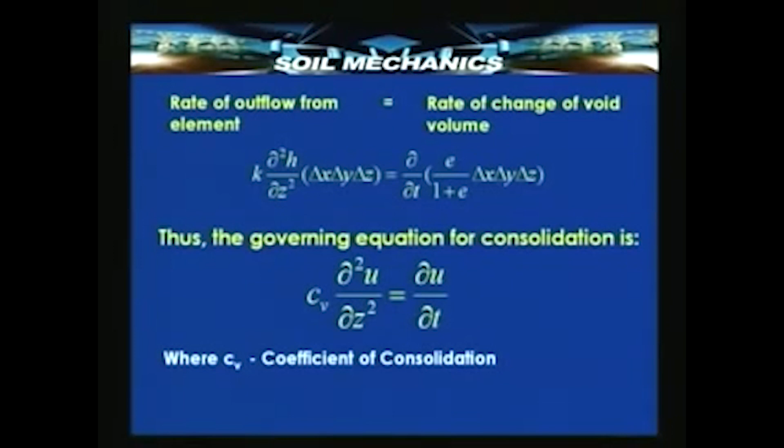This expression shows that u is a function of z as well as time. The constant Cv in this expression is known as the coefficient of consolidation, and we must now solve this differential equation to find the relationship between u, the excess hydrostatic pressure, and the two parameters z and t on which it depends.

Let us see the next slide, which shows the sequence in solving this basic phenomenon. Since this is a differential equation, as is normal practice, let us assume the type of solution, the possible pattern of the solution, and then check that if this has to be a solution for the given differential equation, what is the way to solve it.

We assume that the excess hydrostatic pressure u is a function of Fz and phi t, where Fz is a function only of depth and phi t is a function only of time. Since these are independent functions involving independent variables, this process is known as separation of variables. We can now substitute these into the differential equation, Cv delta squared u by delta z squared equals del u by del t, and then obtain this constant.

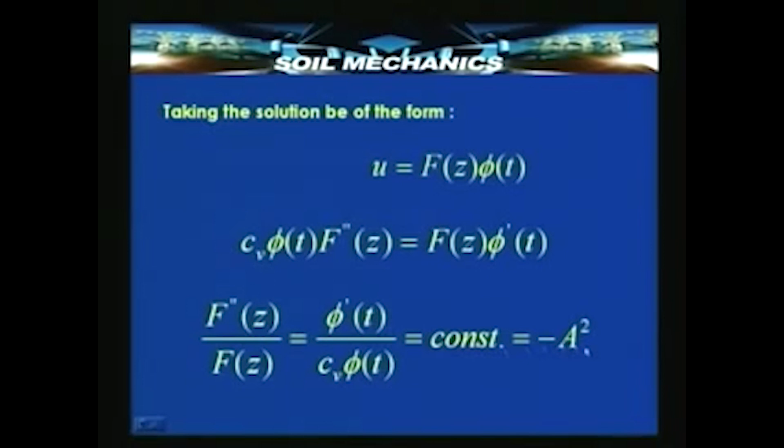Once we have this constant, we can formulate two equations, one for z and one for t, which if solved will give us the total solution for the differential equation. So the total solution is a product of the solution for F(z) and the solution for phi(t). So F(z) times phi(t) gives us u.

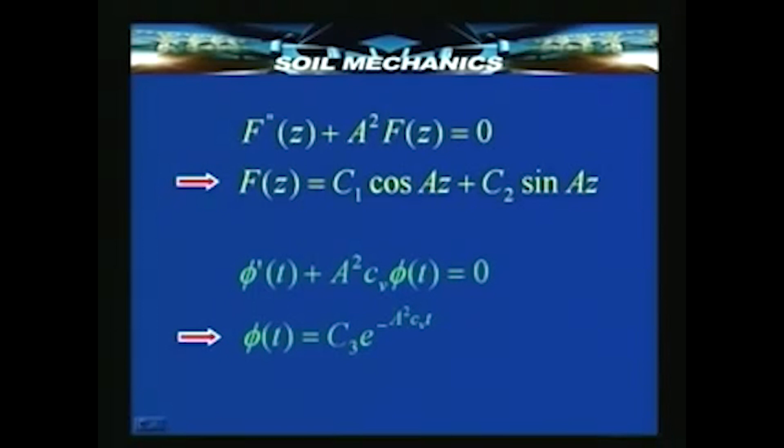F(z) involves sine and cosine functions, with constants C1, C2, A, and phi(t) also involves a constant C3. When we multiply these two, some of these constants also get multiplied, so we can combine them and get a simpler equation: u equals C4 cos(Az) plus C5 sin(Az), times e to the power of minus A squared Cv t.

So now this is the solution in which the constants are unknown. If we determine these constants - basically three constants, C4, C5 and A - the solution is ready. To determine these constants, we always need conditions. We need to know some aspects of the phenomenon which we are trying to study.

For example, this phenomenon involves z, which means the boundaries of the problem, the geometry of the problem. If we know the value of u at some values of z, that can be used for calculating some constants. Similarly, if we know the value of u at some known value of time, that can be used for calculating some constant.

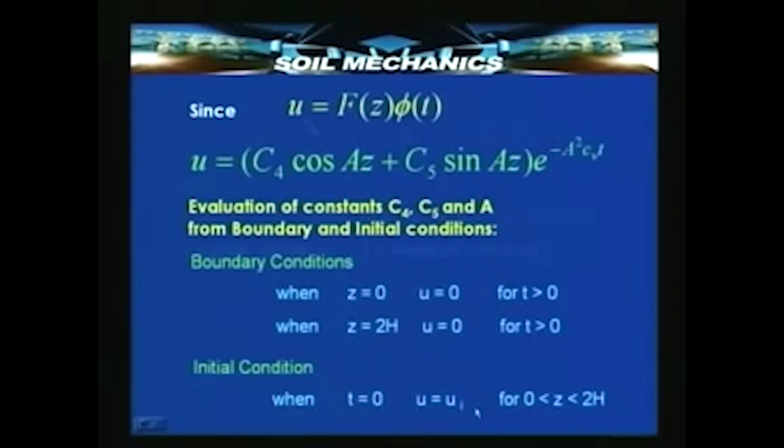So that is precisely what we did - we defined the so-called boundary conditions and the initial condition. Let us take a look at them. The boundary conditions were: at the top of the clay layer and at the bottom of the clay layer, the value of pore pressure, excess hydrostatic pressure, is 0 for all times. The initial condition is that at t equal to 0, the pore pressure is uniform throughout the depth from 0 to 2h, equal to the initial pore pressure ui.

Based on all this, we derived expressions for three parameters. The first is the excess hydrostatic pressure, but just knowing the pressure alone is not our objective. Our ultimate objective is to know what is the amount of consolidation that has taken place at any given point of time. So we need to know the so-called degree of consolidation.

Why we resort to defining consolidation in terms of a degree is because we know the total consolidation - we can always compute it without resorting to this mathematical expression, simply by knowing the change in void ratio over a change in stress range. Once we know the total compression that is likely to take place, the compression at any point of time can be expressed as a percentage of that, which is what we call the degree of consolidation.

There are two ways we express the degree of consolidation. One is uz, the degree of consolidation at any depth z, which is the amount of consolidation that has taken place at a particular time divided by the total consolidation expected there. Another parameter is U, which is the average of all u values over the depth z. So we have expressions for small u, capital Uz, and capital U - these are the three basic expressions we derived last time, which we will use in our computations.

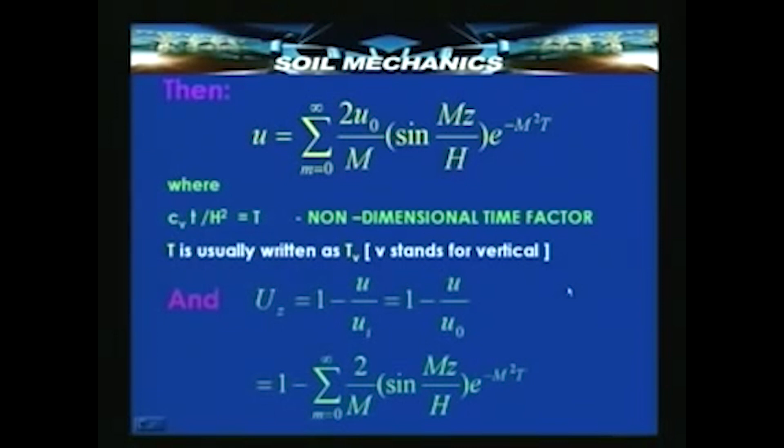So, h is therefore the distance of travel of the water, that is the maximum so-called drainage path. Then the average consolidation has this expression, which again is a function of capital T.

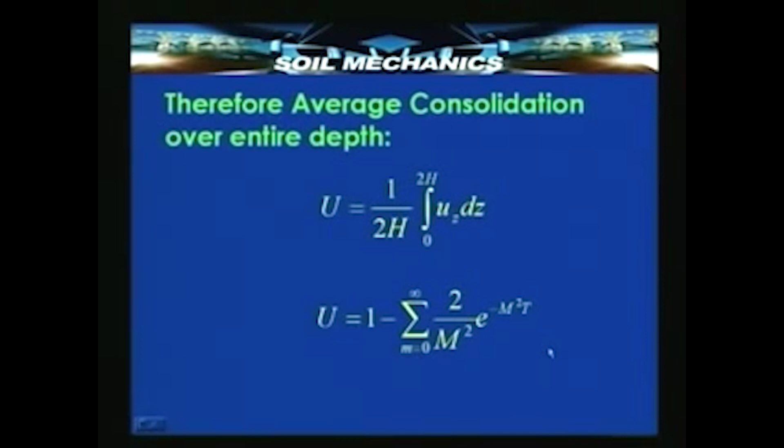Now, let us see some details of the actual values of these degrees of consolidation. That is what we will be doing in today's lecture.

In today's lecture, we shall try to understand the importance of this consolidation equation. You have seen that in this consolidation equation there is still one parameter Cv, which is not dependent upon the initial and boundary conditions. It is not a constant that depends on initial and boundary conditions, but it is a material property.

So this Cv needs to be determined by some experimental technique, and we already know that for studying the phenomenon of consolidation, we have an excellent technique called the oedometer test. We shall also see how to use this oedometer test to compute the coefficient of consolidation Cv.

Then we will follow it up with one or two examples on the use of these values in computation of settlement, particularly the time rate of settlement, that is how much settlement will take place at a given time.

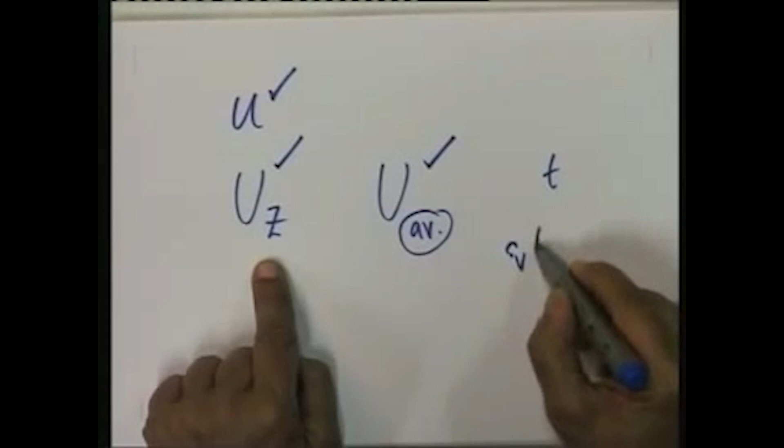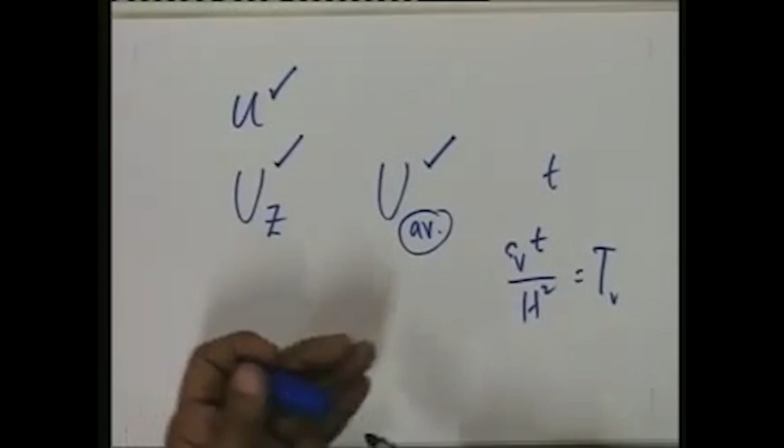Once we know the expression for uz, we can put different values of time into it. Time is expressed in terms of the non-dimensional time factor Cv t by h square. So we shall express time in terms of this non-dimensional parameter Tv and substitute that in the expression for uz, then we will know how the excess hydrostatic pressure varies with respect to time and depth.

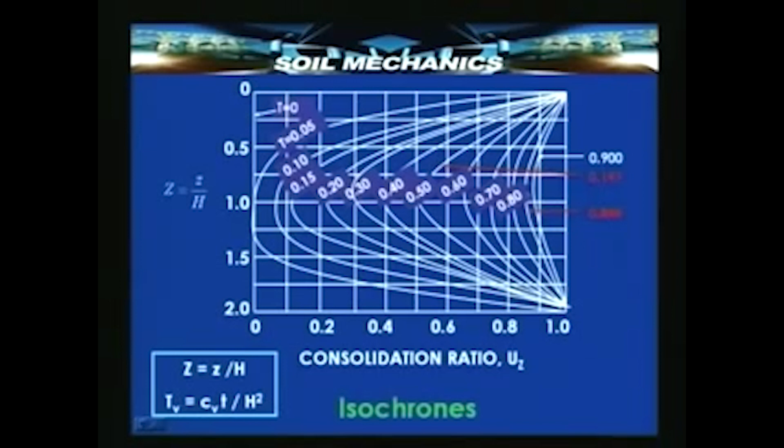Now, these two values have been arrived at by substituting the degree of consolidation in the expression for degree of consolidation and computing the corresponding T. So either you can substitute capital T and find out how the degree of consolidation varies, or for a given degree of consolidation, say 90%, you can find the corresponding time. For 90% we have 0.848, and for 50%, 0.197.

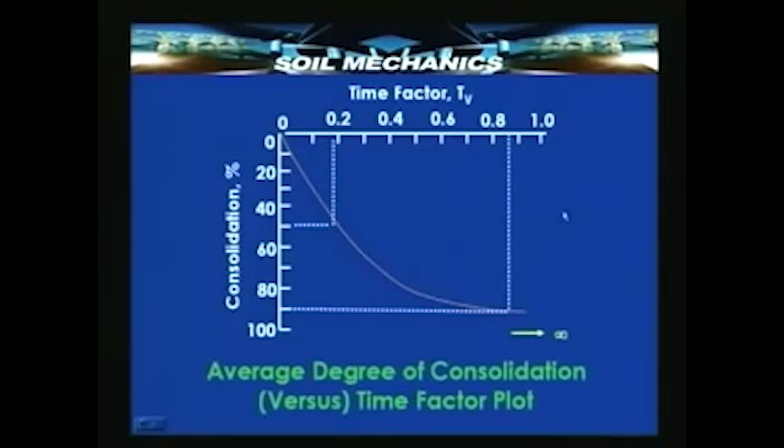Here is again the average degree of consolidation over the entire depth, and once again you find that at time factor 0.197 the average degree of consolidation over the entire depth is 50%, whereas 90% consolidation takes place at 0.848 time factor. Now, you will see that the point of 100% consolidation is rather difficult to locate.

It takes theoretically infinite time, but in practice it takes several dozen hours. So if you apply an increment of load and wait a sufficiently long time, there are chances of the dial gauge reading in the oedometer test becoming virtually constant, indicating that the level of 100% consolidation has been reached.

Now, we very often need this UT relationship in two ways. For a given degree of consolidation or average consolidation, we would like to know what is the time that is going to be taken by a given structure, or for a given structure at a given time what is going to be the amount of consolidation that would or would have taken place. So we need these values.

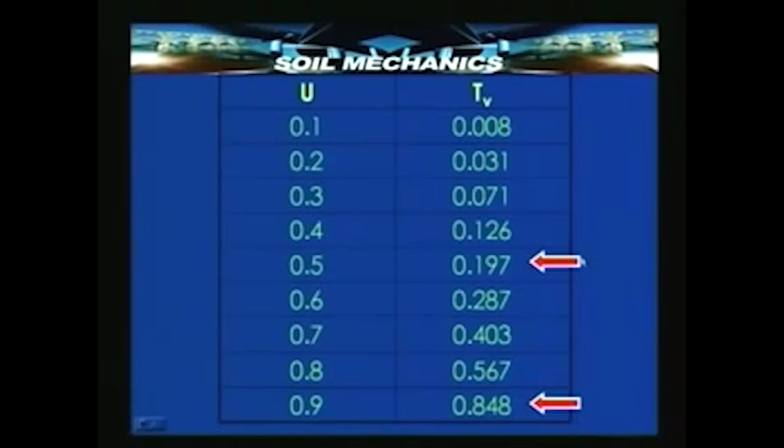We have already seen in the form of graphs, two graphs or two charts, how u versus t varies, but it is more convenient to use a lookup table like the one shown in this slide. Here you find a lookup table of u and TV, u varying from 0.1 to 0.9 and TV varying from 0.008 to 0.848, and for known reasons u equal to 1 has been left out. Two values have been highlighted, corresponding to 50% consolidation and 90% consolidation. These two values in particular are very useful, as you will see shortly.

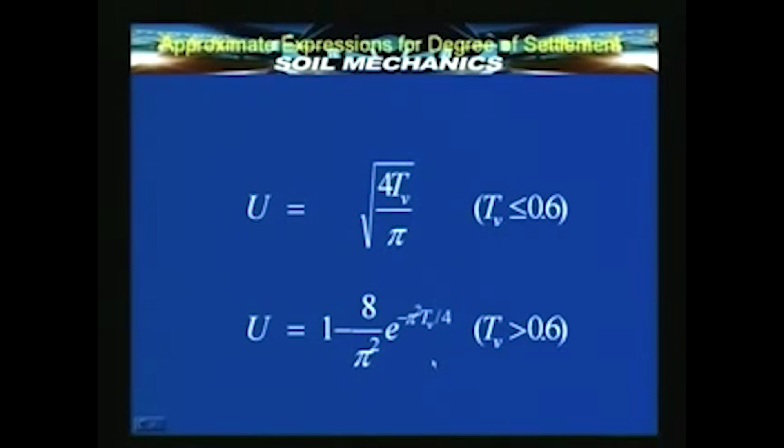The most important issue now is the determination of the parameter coefficient of consolidation. Coefficient of consolidation can be very conveniently determined from the oedometer test. There are two methods for this purpose.

One is devised by D.W. Taylor, a well known soil mechanics engineer, and another by A. Casagrande.

What is special about these two methods is they are both curve fitting methods. That is, we get an experimental curve of compression versus time, and we do some curve fitting on these in order to get certain data on the basis of which we can compute the value of CV. CV is basically dependent upon small t, and therefore if we can get two values of t and the corresponding degree of compression in an experiment, we will be in a position to compute the value of CV, and that is what we try to do.

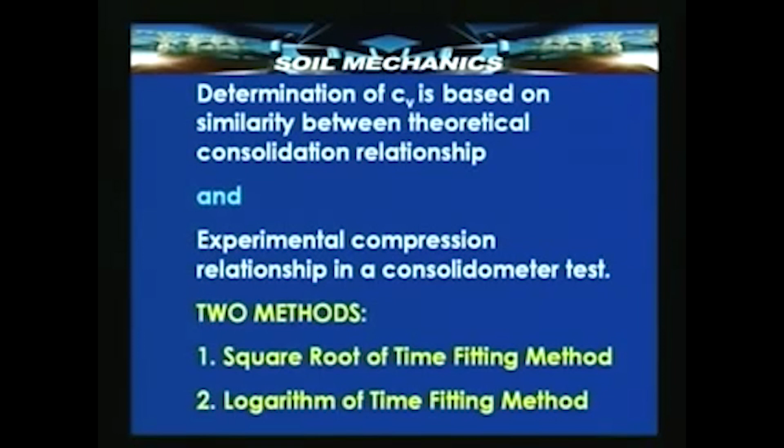As I mentioned, both these methods depend on the fact that there is a similarity between the theoretical consolidation relationship and the experimental compression relationship in a consolidometer test. This means that in a theoretical consolidation equation, we know the precise relationship between u and t. We have seen it in great detail in several of the slides just now.

If you look at it carefully, this capital U is nothing but the representation of the compression of the voids in some terms, and capital T is nothing but a representation of the time elapsed. So the relationship between capital U and T has to have some similarity to the plot of compression, that is dial gauge reading variation with respect to time. It is based on this similarity that the methods of curve fitting have been evolved for determining CV.

What Taylor has done is use dial gauge reading versus root of time, considered similar to U versus root of capital T, whereas Casagrande has taken dial gauge reading versus logarithm of time as similar to degree of consolidation versus logarithm of capital T. Let us take the square root of time fitting method and see how that operates.

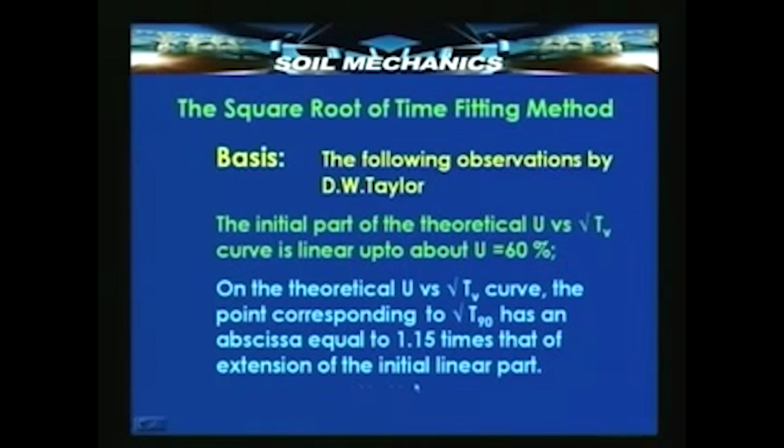The point corresponding to root of T90 is found to have an abscissa of 1.15 times that corresponding to the extension of the initial linear part. Let us take a look at the curve again.

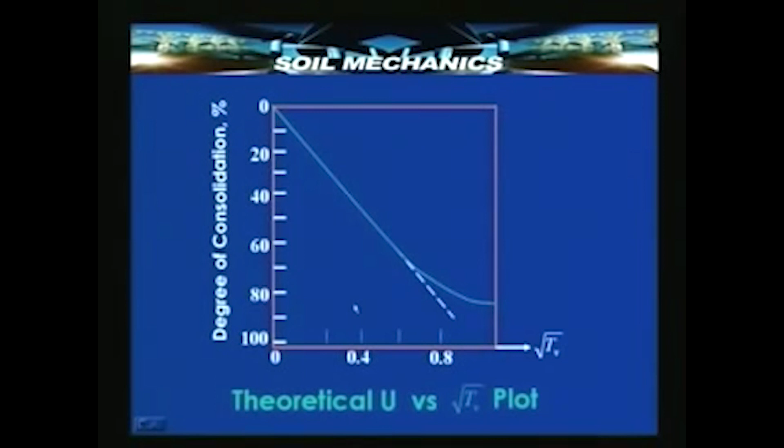See, the point corresponding to 90% consolidation here is found to have an abscissa which is 1.15 times that of a corresponding point on the line extended here, and that is a basis for determining Cv. That is, we take an identically similar looking curve, the curve of dial gauge reading versus root of small t, and in this we try to locate the point which has got an abscissa which is 1.15 times that on this straight line.

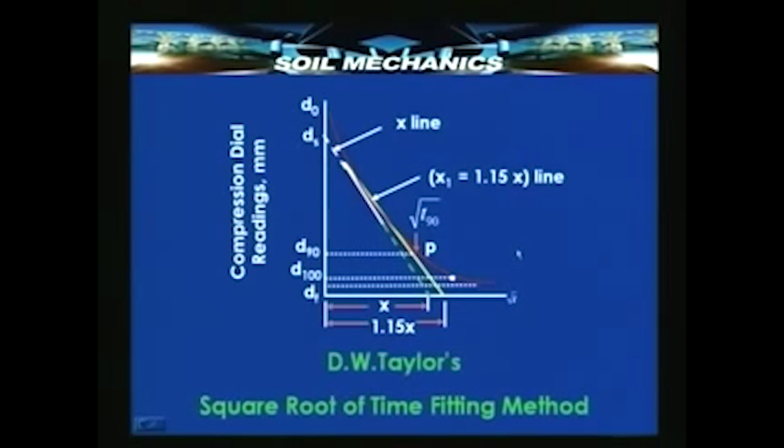And once we know D90, we will know T90 or root of T90. Once we know root of T90, we already know the relationship between small t and Cv. We know the sample thickness in the oedometer test, and that we are providing double drainage on both sides, so we know the maximum drainage path is half the thickness of the sample — the maximum distance water from the center of the sample has to travel to get out of the soil element.

So root of Tv corresponding to 90% can be determined from this graph. Once we know that, since we already know capital H and that the capital T value is 0.848 for 90% consolidation, we can use all this information for calculating Cv.

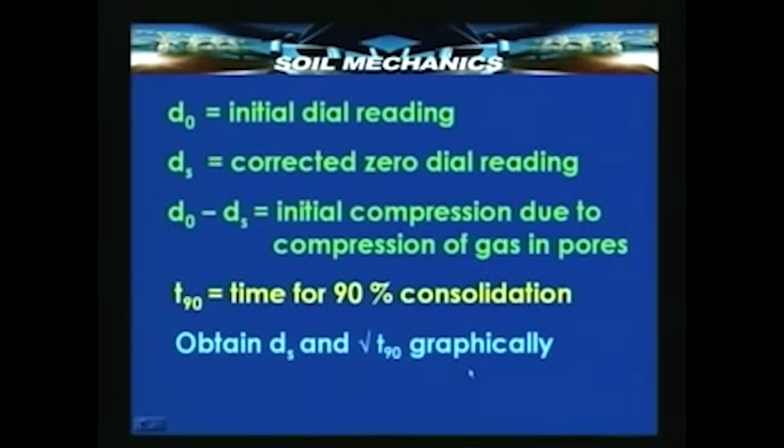So if you have the initial dial gauge reading D0, first you have to work out the corrected zero dial reading after accounting for gas compression and so on, because that is the point where the straight line part of the curve will cut the y axis. So D0 minus ds is the initial compression of the pores due to compression of gas. Once we obtain ds and root of T90 graphically as shown earlier, we can easily determine Cv.

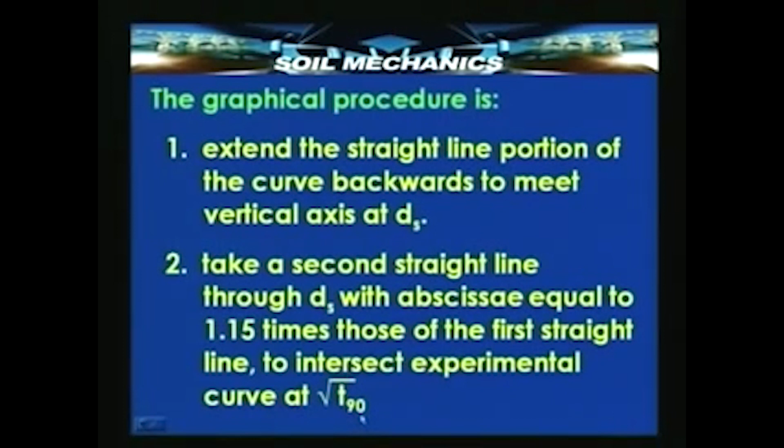The graphical procedure, as I mentioned earlier, consists of two parts. One is drawing the straight line portion so that it meets the vertical axis at ds, and then extending it, and then taking a second straight line with abscissa equal to 1.15 times those of the first straight line, and finding where it intersects the red curve — that is the point corresponding to root of T90.

Finally, once we know capital T90 is equal to 0.848, we have a method to calculate Cv, since we know small t90 and capital H, which is nothing but half of the average thickness of the soil sample in the oedometer test.

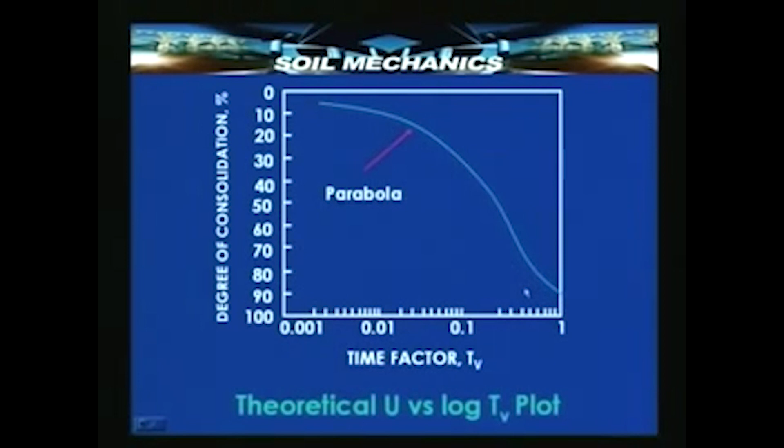Now the explanation for the logarithm of time fitting method becomes much simpler. Here, degree of consolidation is plotted against log of Tv, that is against Tv to a log scale, and this is found to be very close to a parabola, and it is found to be similar to the experimental curve where we plot dial gauge reading with time.

We will now see the logarithmic method of Casagrande, in which u versus log t is used. It is seen that the u versus log t curve is similar to the dial gauge reading versus log time curve.

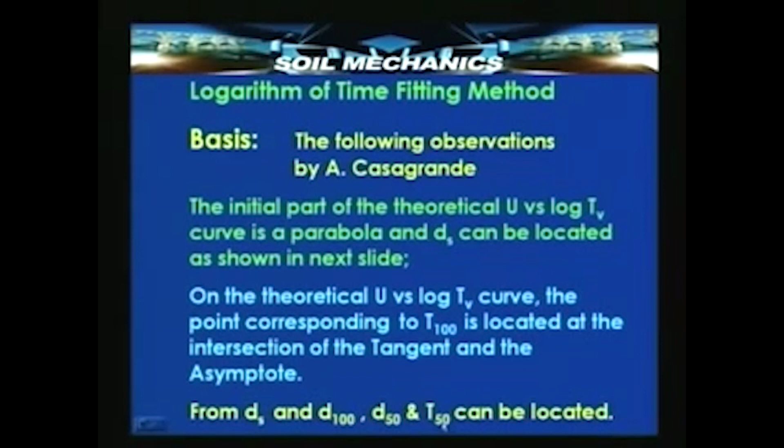In this method, instead of T90, we locate T50. We need to locate the starting point corresponding to ds, and the point D100. Once we know the dial gauge reading corresponding to 0 and to 100, we can interpolate and find the dial gauge reading corresponding to 50 and the corresponding time factor capital T50. Here is the explanation for the method in pictorial form.

Once we know small t50, again we use the same formula involving Cv and get the value of Cv.

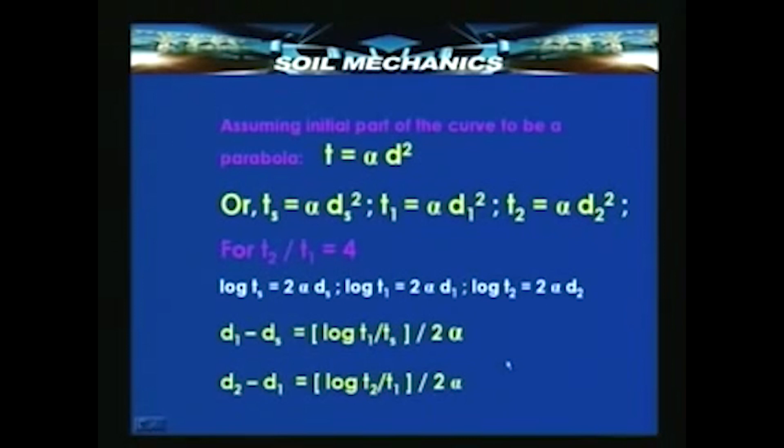Let us see the reason. We have taken the first part to be a parabola, that is time must be proportional to alpha d square. At all times on the parabola, time must be proportional to d square, because the parabola has an equation of the type y equals ax square. This means at the starting point Ts must equal alpha ds square, at point A, T1 equals alpha d1 square, and at T2 it equals alpha d2 square. Since T2 by T1 is 4, we find that on the logarithmic scale d1 minus ds and d2 minus d1 are both equal, absolutely similar, and that is the basis for computing this distance and arriving at the correct starting point ds.

So we select any two points A and B, one having time T1, the other having time 4 T1, and using the difference between these as a starting point, we choose a point ds which will have the same difference in ordinate as shown. That means ds is located.

Now what remains is to locate d100, taken as the intersection point of the tangent here and the tangent at the last portion of the curve. These two intersect at a point corresponding to which the time is t100, the degree of consolidation u is 100%, and the dial gauge reading is d100.

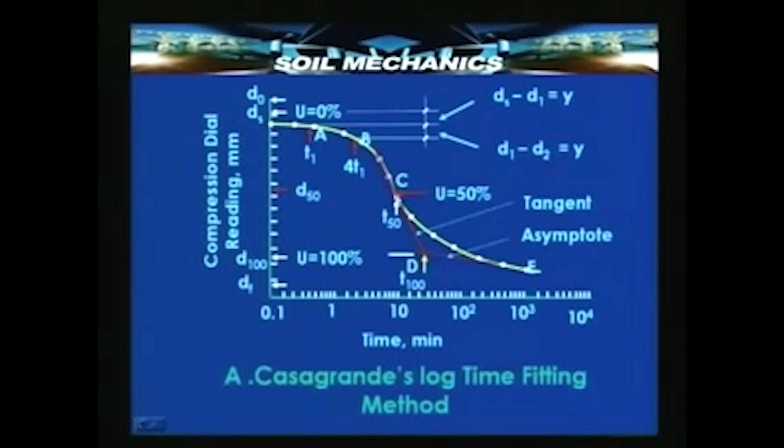Between these two, somewhere in the middle lies d50 and t50, on the basis of which we calculate the value of Cv. So by making d1 minus ds equal to d2 minus d1, we are able to calculate the starting point of the curve.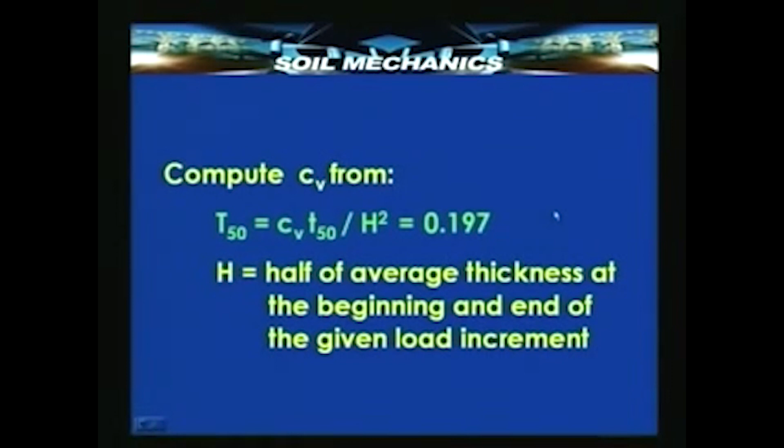Once we know T50, since it equals 0.197, we can substitute that and get the value of Cv. Capital H corresponds to half the thickness of the sample, and since the sample thickness varies during the experiment, we take half the average thickness of the sample for computation of Cv.

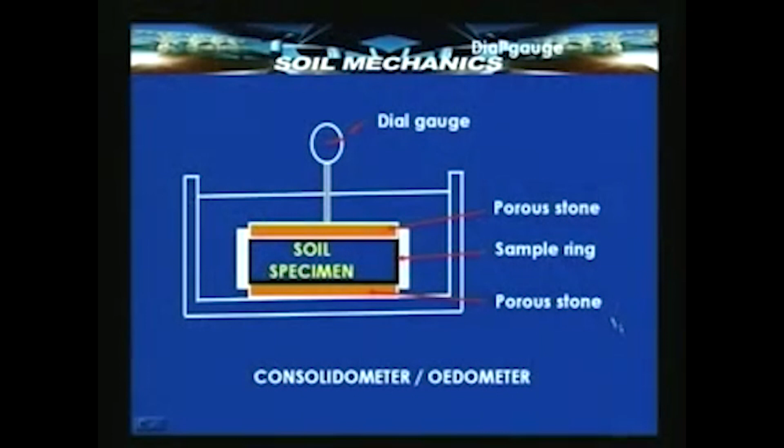I had mentioned in one of my earlier lectures, which I am now briefly reproducing, that there are four different compressibility parameters: Cc, Av, Mv, Cv. These are the units, and it is possible to determine all of these from this well known consolidometer test.

As a starting point for determining these, we need to know the void ratios. We have the dial gauge readings, which we gauge from the experiment, the so-called oedometer experiment, and we have the time, or root of time, or logarithm of time, as the objective may be.

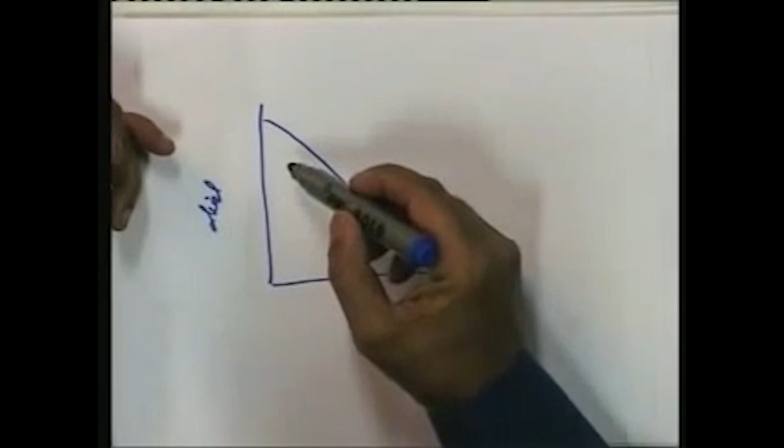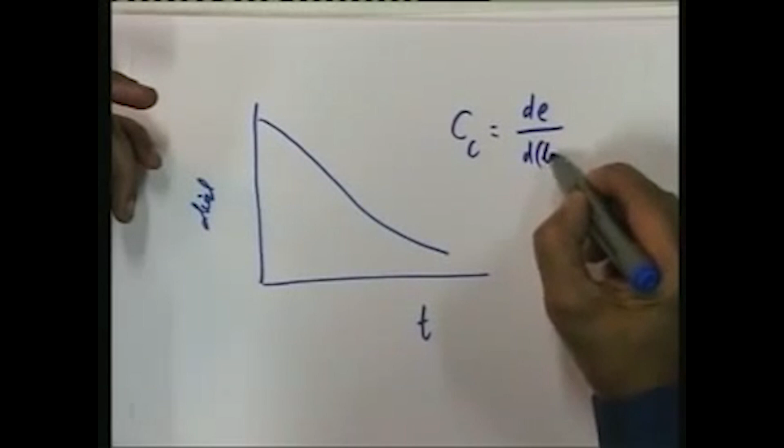This is a curve somewhat like this, and ultimately we are interested in knowing the change in void ratio, because for determining Cc, we need the expression de by d log p, and for determining Av, Mv, we need de by dp. This means that void ratio versus pressure curve is a must. It is unavoidable, it needs to be drawn.

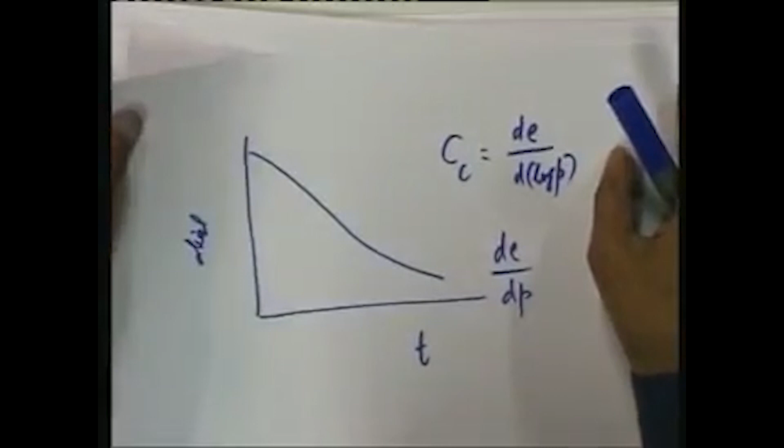This means it is not always sufficient to just plot the dial gauge reading versus time. That is okay for computing the coefficient of consolidation Cv, but to compute void ratio changes, we need a little computation based on the dial gauge reading variations. Void ratio computation can be made by two methods: one is the height of solids method, the other is the change in void ratio method. Let us take a look.

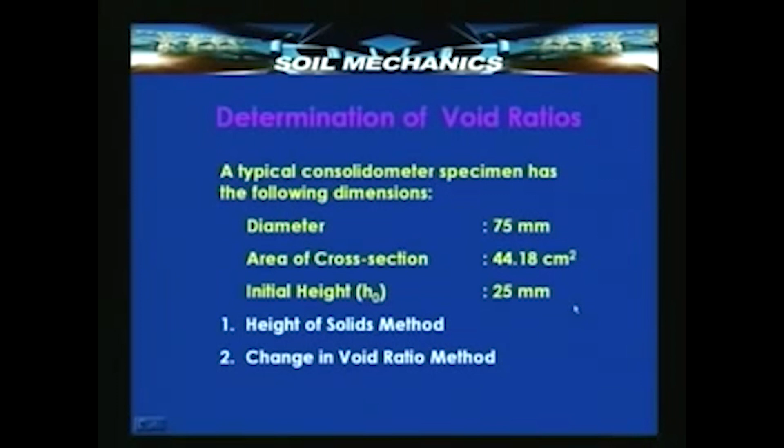In a consolidation test, typically we know the diameter of the specimen, therefore we know the area of cross section, which is pi by 4 d square, and we know the initial height, 25 mm. It is all standardized, the equipment is internationally stipulated, so these dimensions are known. In the two different methods, we try to relate the dial gauge readings through the compression of the soil sample to the void ratio.

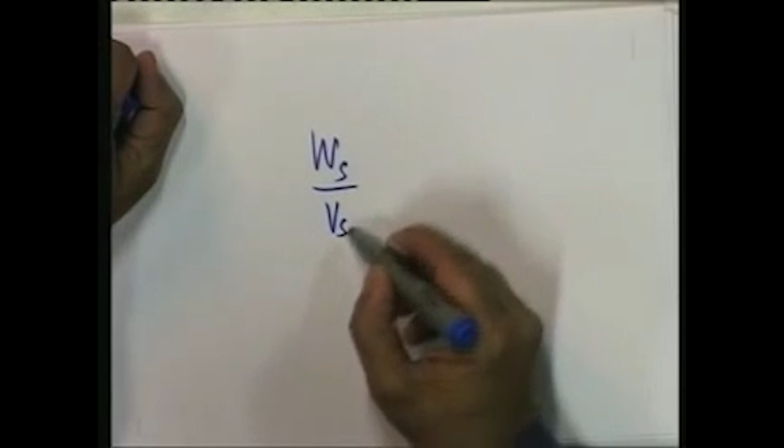In the height of solids method, essentially we are looking for the height of the soil specimen and how it varies. If we know the dry weight of the specimen, we can calculate the unchanging height of solids Hs by this formula. This is a well known fundamental formula where Ws by Vs, which is the density of the solids, when divided by gamma W, gives us the specific gravity G.

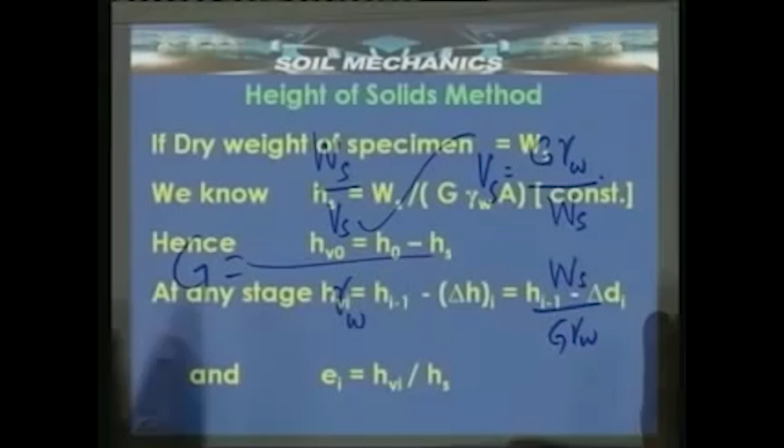So we can find the volume of solids Vs in any given case will be G gamma W divided by Ws, or the other way around, Ws by G gamma W. So the height of solids can be found as Ws by G gamma W, and since it's a volume, the height can be obtained by dividing this volume by the area of cross section of the specimen.

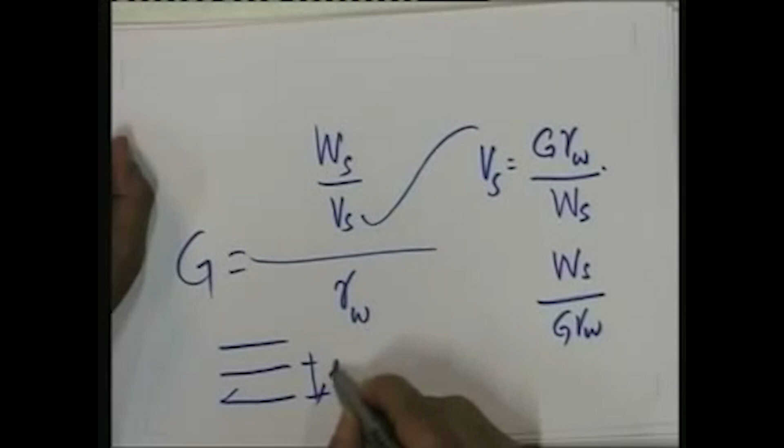This means the height of the voids alone at the starting point will be the initial height of the sample H0 minus the height of solids. So at the starting point, this initial height of voids can be obtained from H0 minus the height of solids, because the height of solids remains the same throughout the experiment. This means that at any instant during the experiment, the height of voids, which will go on changing, will be equal to the previous height minus the change in height, or change in dial gauge reading, that takes place.

Once we know this, we can calculate the void ratio as height of voids by height of solids. So the attempt in this method is to determine the change in height of the specimen and relate it to the change in volume of the voids. So E is taken as height of voids by height of solids rather than volume of voids by volume of solids. At any stage, HVi, the height of voids at instant i, will equal the height of the specimen in the previous stage minus the change in height, which is the change in dial gauge reading.

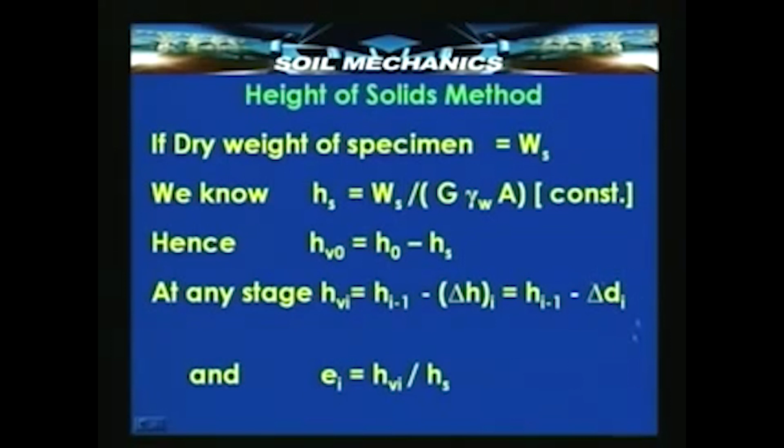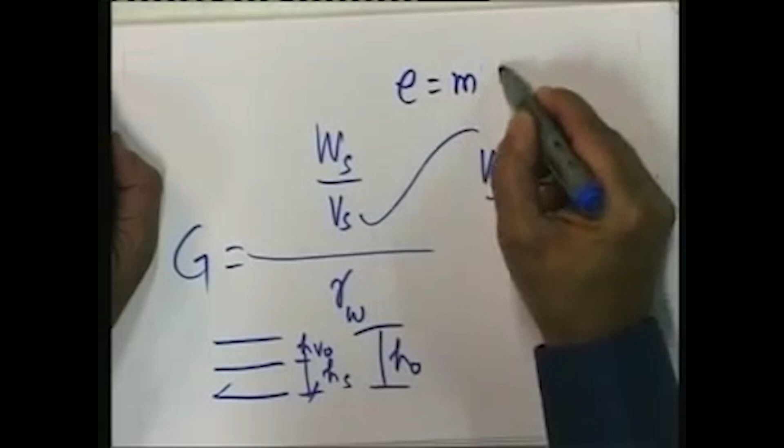A similar approach applies in the change in void ratio method. Here we take advantage of the fact that the soil sample is saturated and remains saturated throughout the experiment. Sometimes it may not, but for practical purposes we assume it remains saturated. Since it is saturated throughout, we know that the void ratio for a saturated specimen must equal the moisture content into the specific gravity.

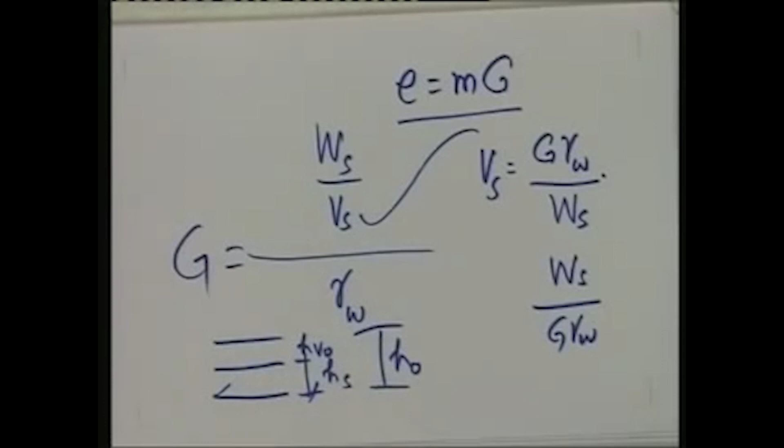So we know the height of solids can be found from the final height divided by 1 plus EF, that is, the volume of solids. If we have several stages of loading, then the initial height minus the total change in height divided by 1 plus EF will always equal the height of solids, which remains constant.

Because of this, we can say that the change in void ratio must equal the change in height divided by the height of solids. In other words, E0 minus EF must equal the total height change divided by height of solids, or E at the previous instant minus E at any instant i should equal delta H divided by Hs. This is how we can successively compute the void ratio at any stage from the previous void ratio, knowing the change in height and the height of solids determined previously.

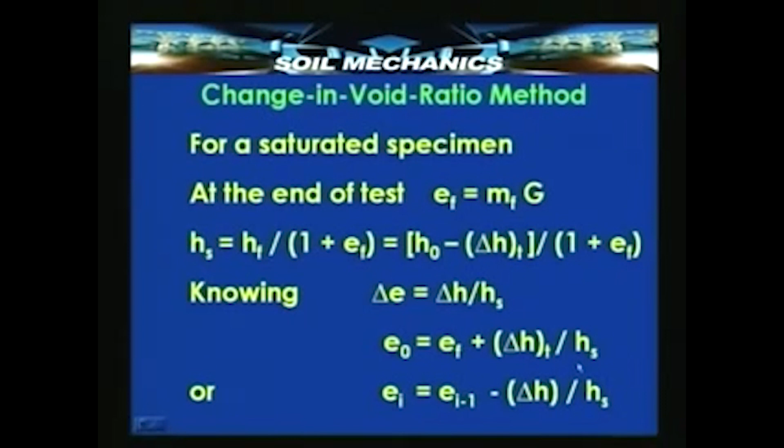We can therefore now plot either the E versus sigma dash curve or the E versus log sigma dash curve. If we have the E versus log sigma dash curve, we determine Cc from that. If we use the E versus sigma dash curve, then we will be determining other parameters.

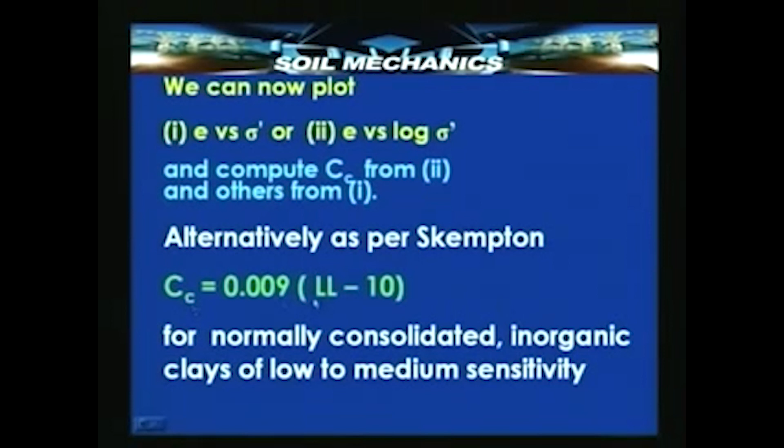Now, incidentally, for determining the coefficient of compression, that is the compression index Cc, we have another approximate expression given by Skempton based on a large number of studies on normally consolidated inorganic clays of low to medium sensitivity. That equation links Cc with liquid limit. Liquid limit is such a basic parameter for a clay that this relationship, where the compression index is related to liquid limit, is a very useful method for computing Cc, because liquid limit is anyway determined and is a very basic fundamental parameter for a clay. The equation is Cc equals 0.009 into LL minus 10.

Now let us see an example. To begin with, let us see how to determine the various soil parameters from a typical test. I shall not be going into the details of the data from a test.

Let us assume that we have the data. Given the data of dial gauge readings versus time, we will be in a position to have the basic data required for computing the volume or the void ratio, as per one of the methods which I described just now. And once we know the void ratios, we will be in a position to compute these various parameters.

So suppose E1 and E2 are the void ratios corresponding to two stress values, sigma 1 dash equal to 200 and sigma 2 dash equal to 350. Then this is the change in stress, this is the change in void ratio. If we use logarithm of change in stress, we will be able to calculate Cc. If we use directly the change in stress, we will be able to calculate the other parameters Av, Mv, Cv.

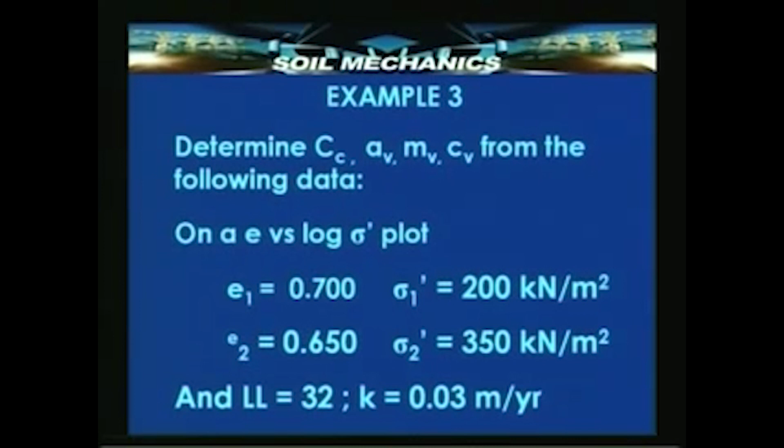Incidentally, the parameter Cc can also be calculated from LL, the liquid limit, and the parameter Mv requires the value of Av, and the parameter Cv requires the value of the coefficient of permeability.

So the answer is Cc will be equal to the change in void ratio divided by logarithm of the ratio of stress, that is 0.206. By Skempton's equation we get a value very close to this, 0.198.

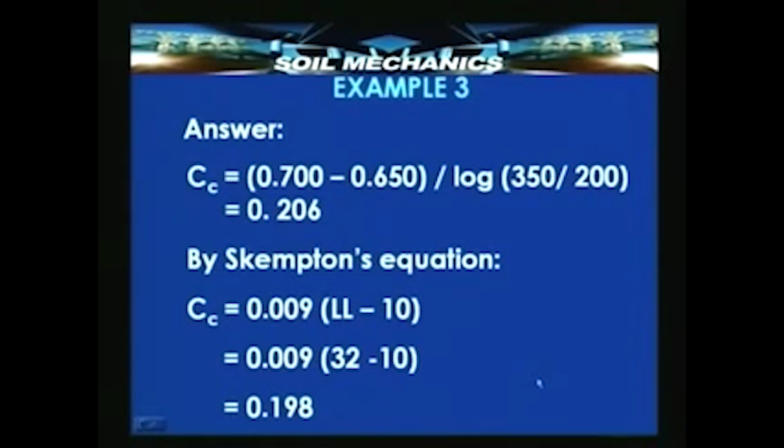Now for this load increment, sigma 2 dash minus sigma 1 dash will be 350 minus 200, and Av, the coefficient of compressibility, will be nothing but dE by dP, and that will be 0.0003, with units of Av being meter square per kilonewton.

Mv is nothing but Av upon 1 plus E. Since we know the starting void ratio, that is the initial volume of the solids, 0.0003 by 1.700, or 1.765 into 10 raised to minus 4, again meter square per kN, is the value of Mv. Cv, on the other hand, requires the value of coefficient of permeability, and this is the expression for it. If you substitute the known values of K, Av and E, you get Cv equal to 17 meter square per year.

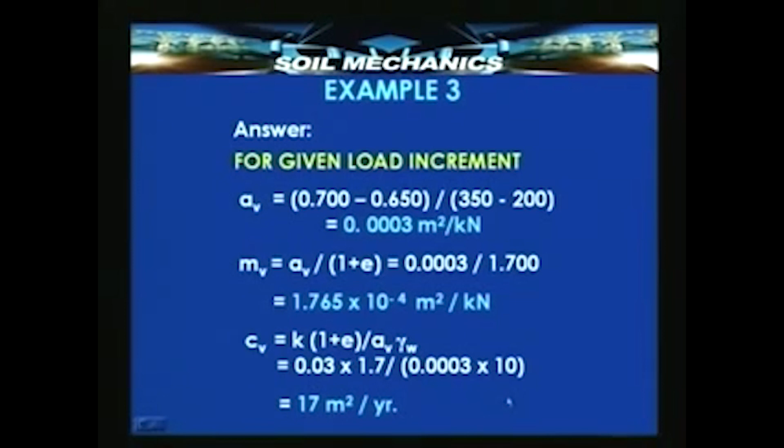Let us take another example. A 6 meter thick clay layer is subjected to a load of 60 kilonewtons per meter square. One year after loading, the average consolidation U is found to be 50%. So the time period small t is given, the stress change is given, and the average degree of consolidation is also given. What is asked is the coefficient of consolidation, assuming one dimensional consolidation, and if k equals 0.03, what is the settlement at the end of 1 year.

The settlement that will really take place here will depend upon the final void ratio. So at this point we are interested in the settlement corresponding to a particular time rather than the total settlement, and that is why we need the coefficient of consolidation here.

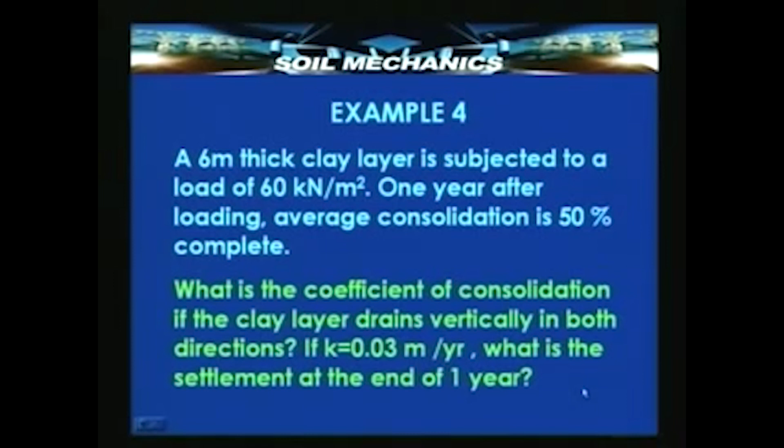The solution will be Cv equals T50 h square by t, because we know the time corresponding to 50% consolidation. So we need capital T50, which we know is 0.197. From this we get Cv. Obviously, once we know Cv, since we know K, we can calculate Mv.

And it is known that settlement corresponding to 100% consolidation, that is the total settlement, in terms of Mv can be expressed like this. Although I have given you the expression for total settlement in terms of Cc and in terms of e1 minus e2 by log of P2 by P1, it is possible to express that in terms of Mv as well, and Mv into delta P into H will give you the total settlement.

So we know the total settlement in this case from these values of Mv, delta P and H, because delta P is known as 60 kilonewtons per meter square, and this gives us 0.609 meters as the total settlement.

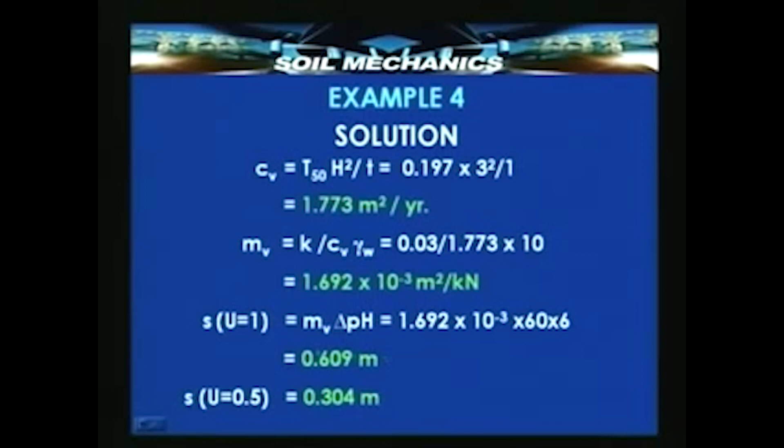So the settlement corresponding to 50% consolidation, which takes place in 1 year's time, will be 0.304, because 100% consolidation corresponds to 0.609 meters. Therefore 50% consolidation would correspond to half the settlement, that is 0.304 meters. However, the time taken for 50% consolidation, which is 1 year, need not necessarily be, and in fact will not be, half of the time taken for the total 100% consolidation, for obvious reasons.

Now we come to an important phenomenon known as the pre-compression phenomenon. There are many locations in the world where there have been glaciers. These glaciers have come down, melted and come down over great distances and covered vast areas, and at some point of time, for certain unknown reasons, they have retreated.

But in this process of coming forward and going back, they had been responsible for applying enormous amounts of load on soils, particularly clayey soils, which are of relevance to us. The clay soils which have experienced this have undergone consolidation under the load of these glaciers, and after the glaciers have retreated, they still remain consolidated, but they are more consolidated than one would expect under the present overburden pressure. So such soils are known as over-consolidated soils.

We need to know in such soils what is the degree of over-consolidation, or what is the pre-compression pressure to which it has been subjected in the past. This is important. Suppose you see this graph which I am showing here.

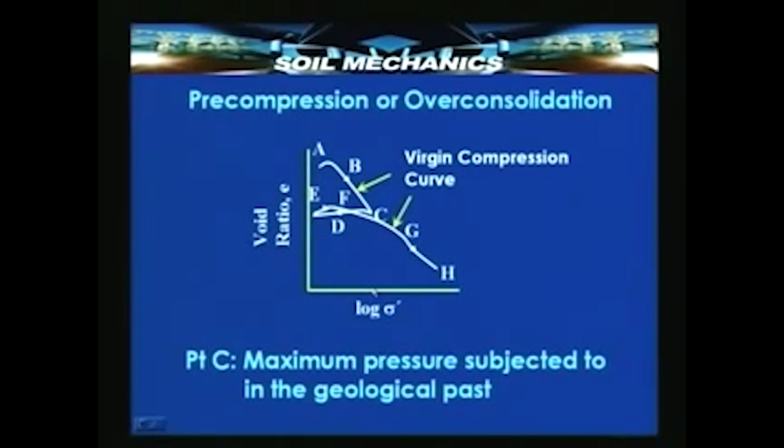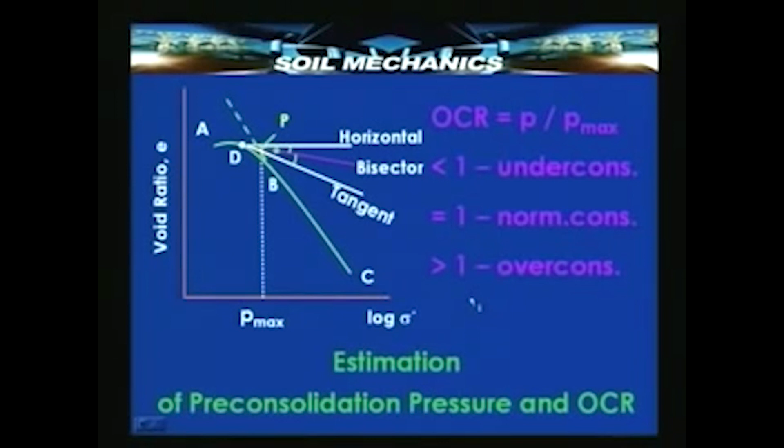Now, this soil being over-consolidated, we can find out what is this value of P max compared to the pressure P that it is now experiencing. Suppose this pressure P now which it is experiencing is less than P max, then the soil is under-consolidated. If this is equal to P max, then the soil is normally consolidated, and if it is more than P max, it is over-consolidated. Or to put it in other words, if the maximum pressure to which a soil has been subjected earlier is more than the present overburden pressure, then the soil is over-consolidated.

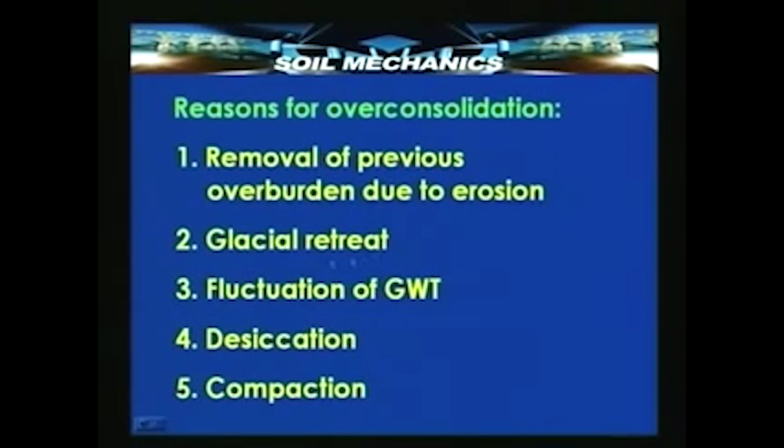There are many reasons for over-consolidation. I have explained particularly the glacial retreat as the main reason. There are other reasons as well.

So in this lecture we have understood the importance of the consolidation equation. We have seen how the oedometer test can be used for determination of the coefficient of consolidation and also the void ratio changes, and then we have seen a few examples. We have closed the lecture with a discussion on pre-compression, and we shall now pass on to some other topics in the next lecture. The topics will be the so-called secondary consolidation and the radial consolidation, which again we will follow up with a few examples.